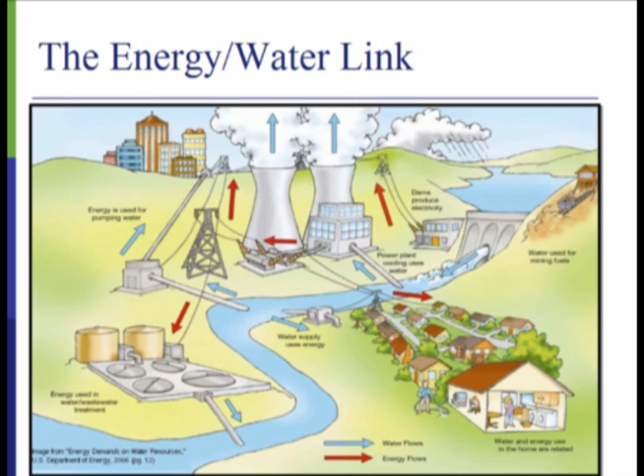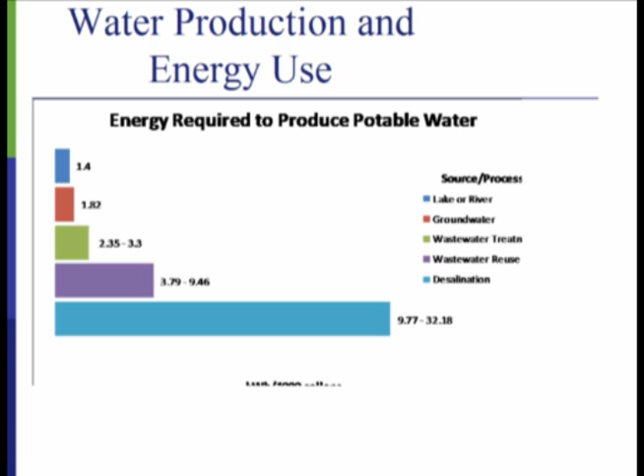So if you have leaks in your system, leaks in the transmission, you still are paying an energy cost for that lost water. Now, in the next slide, we're going to be looking at water production and energy use. Water delivery and wastewater treatment are extremely energy intensive, as you can tell from the purple bar. Water quality standards are becoming stricter, so more energy is needed to treat the water. And as population grows, more energy is needed not only to convey water to more people, but also over longer distances. So every year in the U.S., we have 5,100 miles of piping added annually just to get the water from the source to the plant. So those are all important aspects.

Some of the challenges we see begin with leakage. As I just mentioned a few seconds ago, leaks waste energy and water. And in many distribution systems around the world, we find many, many leaks. We find them in industrialized, developed countries where infrastructure is old.

In the U.S., we have almost 1 million miles of water distribution piping. And based on survey data, 3% of all that piping is more than 30 years old. We witnessed some, at a conference recently, pipes that are still active in an eastern city that were put in the 1830s. So we are talking some old infrastructure. Each year we have more than 237,000 breaks in water piping.

3,590 miles of piping have to be replaced every year, and we need a lot of additional pumping capacity to overpower the demand caused by leaks. In many systems, water utility operators have to deliver water, so when they have leaks, they increase the pressure to push more water through the pipes. But increasing the pressure increases the leak, so you have a circle that becomes unbroken. Unfortunately, it keeps leaking more and more.

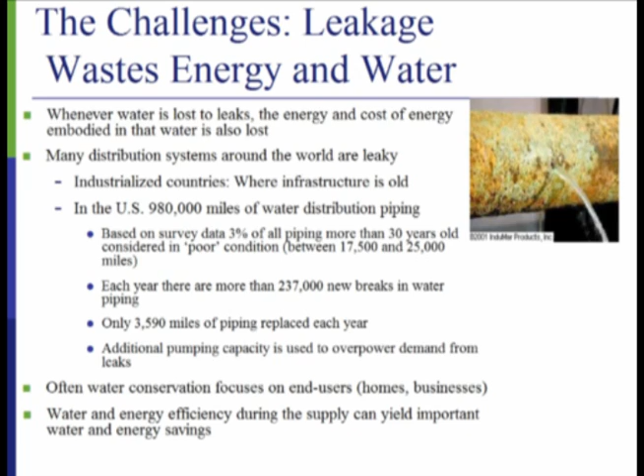So I think the next slide talks a lot about wastewater treatment and energy use. As you can see, aeration is a big part of the energy use in treating water. It accounts for more than half of the primary energy use that's needed.

You have these activated sludge processes that use fans and blowers, and they use a lot of energy. Pumps also consume a large share, requiring about 4% of total plant use. Heating and solids dewatering are processes employed to treat solid waste matter removed from wastewater streams. Other processes, such as chlorine mixing and effluent filtering, use about 15% of the consumed energy in this water and energy field.

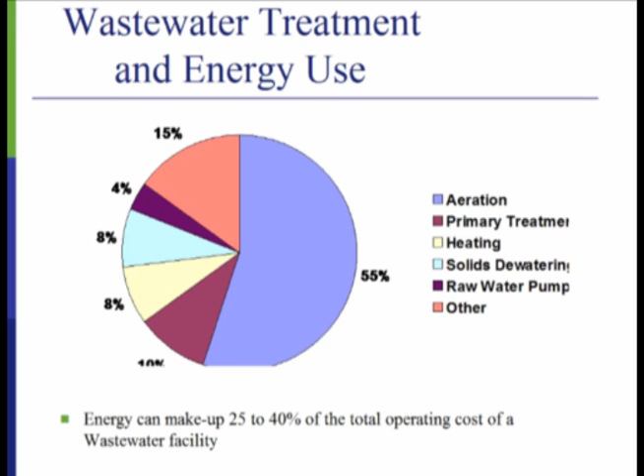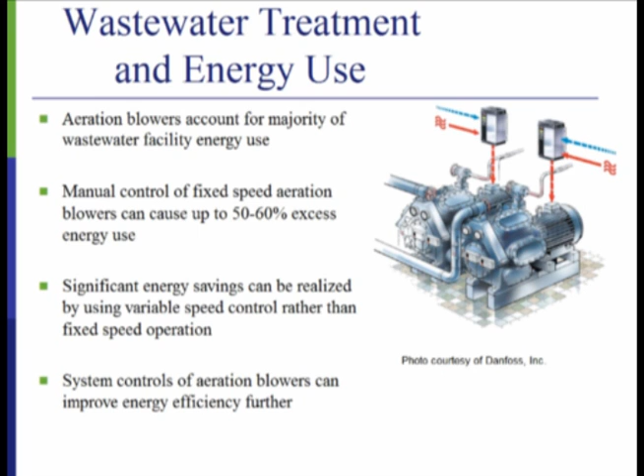Wastewater treatment and energy use is a very interesting topic. The aeration blowers account for the majority of the wastewater facility's energy use. Manual control of fixed-speed aeration blowers can cause up to 50 to 60% excess energy use, so variable speed controls, variable speed fans, and variable speed motors are really critical. Unfortunately, most of our infrastructure uses the same motors that have been there for the last 30 or 40 years, and they aren't variable speed. System controls on aeration blowers also improve energy efficiency, and we really have to look at this area when we talk about energy and water.

Now that leads us right up to the topic of today, which is Watergy. Watergy is a name that the Alliance began using around 13 or 14 years ago when it created this program to link water and energy. What it does is try to maximize the efficiency of both energy and water at the utility level. Each gallon in our system requires energy, and it's pretty easy to get 20% or more energy savings off of a typical system in the U.S.

Water and energy efficiency frees up funding for other crucial public services. This is really critical, because if you're a city manager and your water utility has huge water and energy bills, cutting those bills frees up dollars that can be used for education or other infrastructure within the city or municipality. So this is a good way to really free up funding that you wouldn't have otherwise.

Mitigating risk in increasingly water-constrained environments is critical even today, and it's going to be more critical later down the road. So what does a Watergy project involve? It involves an assessment of the main end-use application, assistance with design for energy efficiency where we look at the system holistically, examining every piece, and then looking at how we can add controls and sensors so operators know what's happening at any point in the system at any given time.

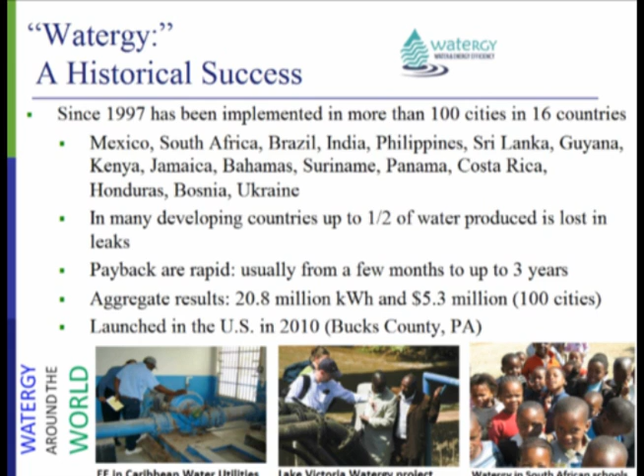Our aggregate results have been about 20.8 million kilowatt hours of electricity saved and $5.3 million annually in savings on these projects. Just this past year, we launched our first Watergy program in the U.S., in Bucks County, Pennsylvania. It's really been heartening to see interest in the U.S. now for a program that's existed for 13, almost 14 years in other countries.

The projects we've run around the world cover pretty much all the continents. We have projects in India, Ukraine, Kenya, South Africa. We've also done training on what Watergy is, at the level of plant operators and at the level of mayors of cities. Last year we ran a training program for 25 mayors in China. It's becoming a big issue worldwide.

Our next slide is a case study in Emfuleni, South Africa. There, the problem was 80% of the water flowing to the homes was lost through leaking main pipes and plumbing fixtures. That's 80% of the water. If you think about that, for every 100 gallons or 100 liters of water that flowed through the system, you only ended up with 20 getting to the ultimate consumer. That is a huge penalty on the energy it took to pump it through the system, aside from the fact you've had to provide all that water and it's just lost.

So the technical solution started with pressure management. We looked at automated pressure management valves on each supply line and reduced the high bulk pressure. Further reductions occurred at night through a demand response program. We commissioned $800,000 in construction in September 2005.

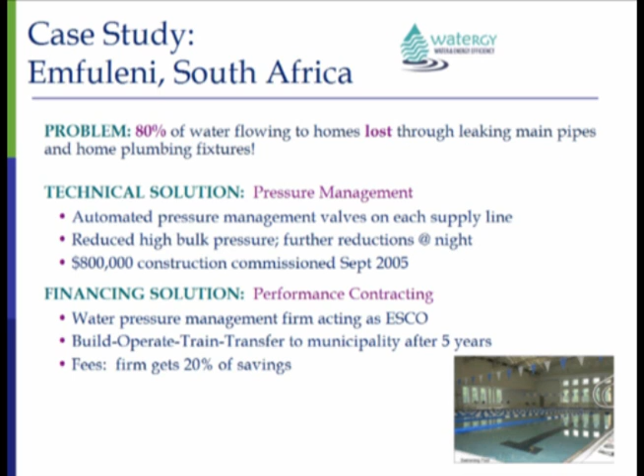The picture of the Olympic-sized swimming pool illustrates that every hour, the 80% leakage would fill 2 of those pools, and would fill a small reservoir in a year.

The Emfuleni results: our payback period was less than 3 months. Annual savings were $3.8 million, and water savings were over 2.1 billion gallons, or greater than 30%. Energy savings were 14 million kilowatt hours. An added benefit was CO2 reductions—more than 12,000 metric tons per year were saved. This was a great project, and it really shows the benefits of this program.

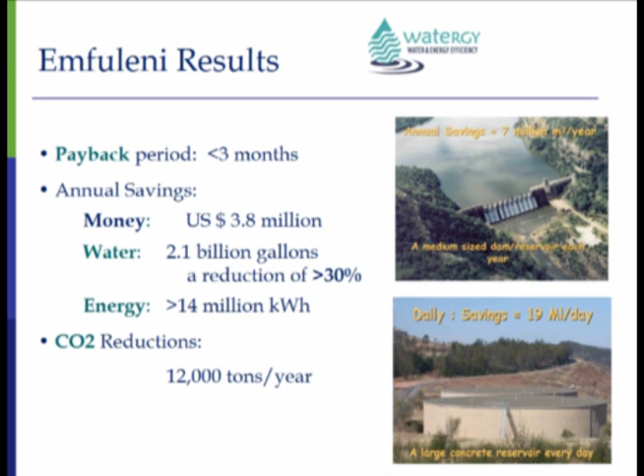A second case study is one we did in Fortaleza, Brazil. Here, many households weren't even connected to water service. There were many inefficiencies in pumps, operations and maintenance, and systems management. The utility couldn't afford the energy costs. So our project brought in automated controls and sensors on pressure and pumping, improved data collection and analysis, and improved motor efficiencies.

The automatic controls and sensors are basically like a SCADA system in the electric utility industry, giving operators immediate knowledge of what's happening at any point in the system so they can divert flows or cut off valves. It's a really important part of an overall system approach.

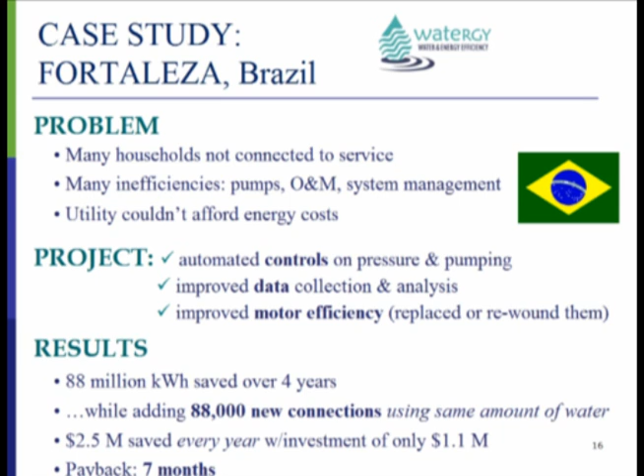Now, our results were pretty amazing here too. 88 million kilowatt hours were saved over 4 years, and this utility added 88,000 new connections but used the same amount of water as before we did the project. We had $2.5 million saved every year, and the investment was only $1.1 million. So the simple payback was 7 months. That again is a pretty amazing case.

So let me just reiterate now, the cost-effective actions in a Watergy program are improving the efficiency of the pumping system, leak detection and repair, lowering pressure, automated controls, energy management, and metering and monitoring. Those 5 areas are where you get quick paybacks and improve system efficiency to an incredibly high degree. I think I'm going to turn this over now to Mary Ann Dickerson.

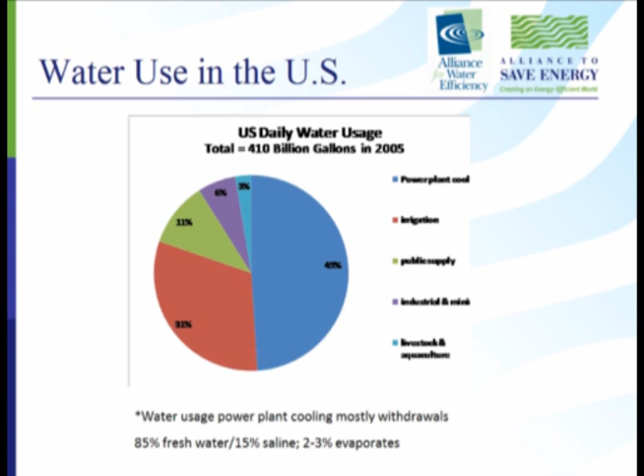So how does that actually relate to what we're looking at in terms of consumption? The first thing we need to look at is where there are areas of the country experiencing drought and shortages. This is the most recent U.S. Drought Monitor map, downloaded as of June 21st. You can see that large areas of the southern United States are experiencing D4 exceptional drought conditions, with Texas in particular being very hard hit.

When you download the map at various times in the year, it will always look different. There will always be regions in drought at one point and perhaps not in others. But what this analysis really shows us is that where there are serious drought issues, there need to be additional measures taken to optimize water use and reduce wasteful activity.

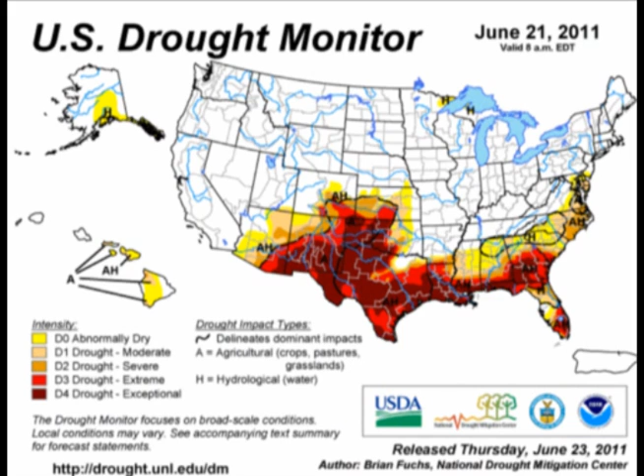But lest you think this kind of drought is restricted to these areas of the country or just the arid West, take a look at data prepared by the U.S. Government Accountability Office in 2003. They conducted a survey asking individual states when they were likely to experience a state, local, or regional shortage by the year 2013, which really is 2 years from now.

36 states responded positively, as indicated in the color coding: 2 states said they would have statewide shortages, 16 said they would experience regional shortages, and local shortages were reported by 18 states. But a number of states did not respond. 3 of them—California, Nevada, and New Mexico—I would argue are always in a continuous state of some kind of shortage. So I would argue we should add those 3 states to our number, making it 39.

If you take a look at Alabama, which did not report a shortage in 2003, it would very likely now say that the area around Birmingham is experiencing periodic shortages. So that makes 40 of the 50 states in a situation where water supply shortages are imminent or likely.

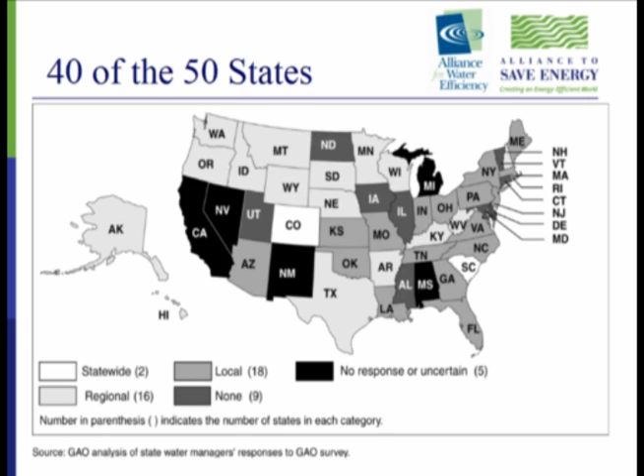How does this then relate to energy? Well, if you take a look at this well-distributed graphic from the California Energy Commission report, you'll see that each stage of that water supply, treatment, wastewater treatment, and collection cycle is energy intensive.

In 2005, the Energy Commission in California released an analysis in their Integrated Energy Policy Report that included an entire chapter on water, both urban and agricultural water usage, and documented ranges of energy consumption on a million-gallon basis. Adding up the entire water conveyance, treatment, distribution, end-use consumption, wastewater collection, treatment, and discharge yielded a range of 2,000 to 20,000 kilowatt hours for every million gallons of water produced. This is a wide range, but it's also a very significant amount of energy.

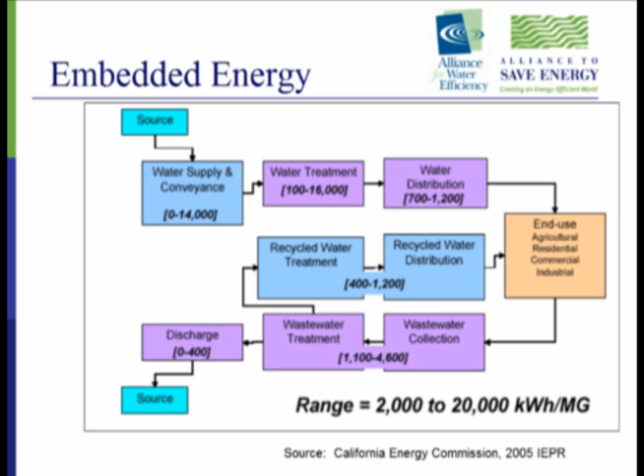With high embedded energy values in water supplies, utilities need to take a look at how best to reduce that energy load. Especially important is this orange area of end-use consumption, which shows that the customer is also an opportunity for energy efficiency and savings.

In the California report, they added up the sum total across the systems in the state, and concluded that 19% of their electric energy load was related to the pumping, treatment, movement, and end-use consumption of water, and 32% of the natural gas load was similarly related to it. So these are sizable numbers.

They indicate the enormous opportunity that exists in the water supply and wastewater treatment community for reducing that embedded energy load. But probably the most surprising finding for me was learning that 95% of the state's energy efficiency goals for that next 3-year period could be met by just funding water efficiency, and at a lower cost - 58% of the cost.

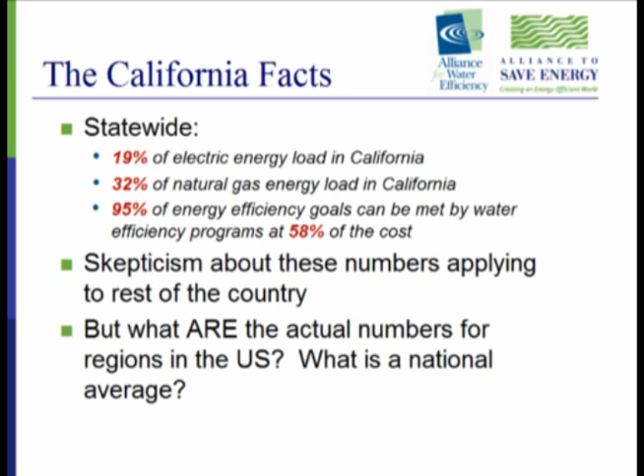So again, astounding findings, and the real question is: is this typical of states around the country, or is California an anomaly? Although there's lots of skepticism about whether these numbers can be replicated, there is clear knowledge that these numbers need to be analyzed for various regions around the country. We don't know what the numbers are regionally or even nationally, and this kind of analysis that was done in California needs to be done elsewhere.

So one organization did attempt to do that. River Network, a nonprofit organization based in Portland, a national organization, took the California Energy Commission methods and applied them to past studies done by EPRI and others, and concluded that 13% of the nation's electric kilowatt hour equivalent energy load was related to water and energy use.

So if we were to take what California reported as 19%, a national average might be as much as 13%, which is orders of magnitude higher than what had been originally estimated.

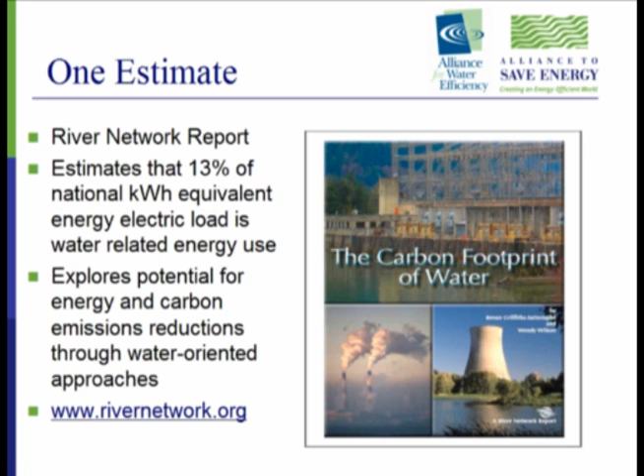This is a crude estimate. We clearly need to do something a lot more detailed, but it points up the need to take a harder look at what's going on at the local level. What the report does that's interesting is explore the potential for energy and carbon emission reductions through demand-side, water-oriented approaches. If you're interested in the report, there's the URL for it, rivernetwork.org.

So when we talk about those water and energy savings opportunities, what are they? Well, hot water emerges as, of course, the clear, obvious choice. You're heating water to render it to a high temperature, and that takes energy. So where you can reduce hot water usage, you're reducing energy. A lot of these programs have been funded by energy efficiency funds in the past.

So these are the kinds of activities in both the residential and commercial sector that deal with reducing water use. Clothes washers, shower heads, and faucet aerator retrofits are easy ways to reduce consumption while not asking the consumer to change any of their behavior. Water and energy audits can also identify where additional opportunities for saving water and energy can occur.

But a largely ignored area is the commercial sector, where certain sectors like hospitals and food service have very high water and energy footprints, and where commercial clothes washer replacement, commercial dishwasher replacement, connectionless steamers, and pre-rinse spray valves are all devices that greatly reduce the amount of hot water used overall.

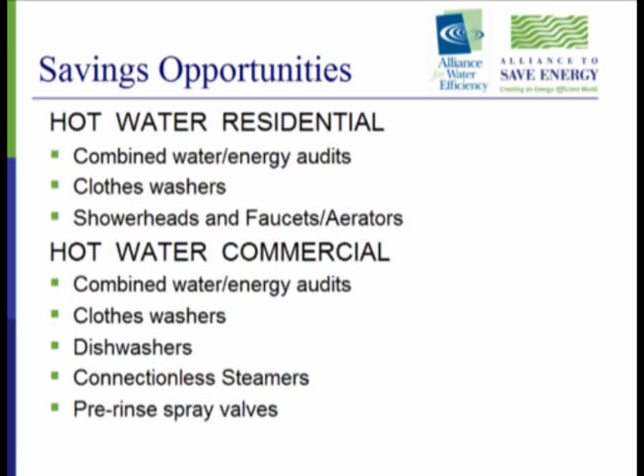Combined water and energy audits in the commercial sector, particularly for cooling tower management, are a terrific opportunity for maximizing those benefits. But let's not forget the cold water side. I think historically energy efficiency programs have not funded cold water programs because they did not believe that the embedded energy was worth funding.

But by ignoring the embedded energy in cold water, they're ignoring multiple benefits from that treatment and distribution.

A high-efficiency toilet does more than just save water at the consumer end. It also reduces flows for the wastewater treatment system and has the potential to extend the life of existing systems that might be capacity constrained, or has the potential for consolidating and creating lower treatment costs.

Landscape irrigation efficiency is another opportunity to greatly reduce a water utility's summer peak, a peak that has been largely growing in systems across the country, and often systems have to be expanded to meet peak demand that sometimes is only 13 or 14 days a year. So by bringing down that peak to more manageable levels and by making landscape irrigation more efficient, water utility systems are increasingly seeing great peak load management benefits.

But what is key is taking a look at the data for the actual individual utility. Generalizations on any statewide basis don't help, because the individual utility has to take a look at what its own embedded energy footprint is. And where there are multiple water supply sources, each water supply source is going to have a different embedded energy footprint. So whether it's groundwater, whether it's surface water supplies, or whether it's an imported supply that has to be conveyed a fair amount of distance, each one of these water supplies have to be calculated on their own merits to see which supply should be on margin and which supply should be optimized.

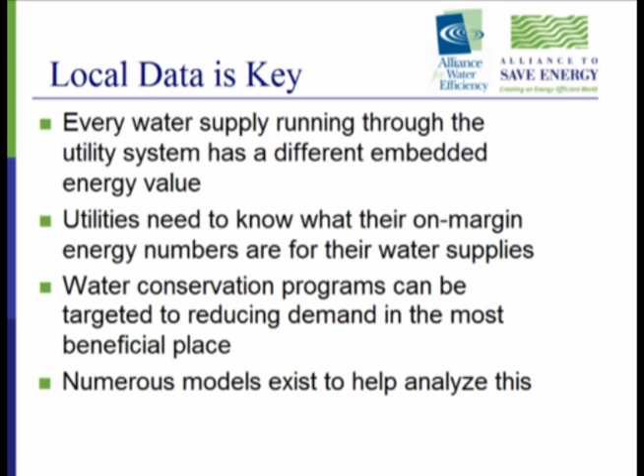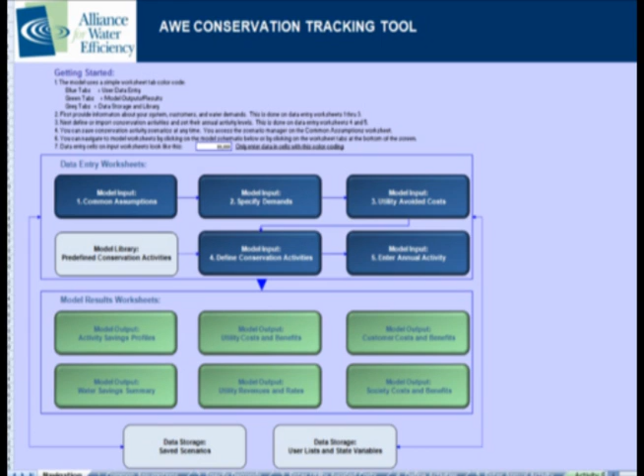I'm going to show you some quick screenshots from something we've built called the AWE Conservation Tracking Tool, which is a very utility-specific model that takes utility inputs and information about their specific system and how it's growing, and then applies water conservation options and evaluates whether those options are cost beneficial for that system. There are 25 programs that are pre-embedded in the model, but new ones can be created. It's a very simple Excel model with dialog boxes that are easy to use.

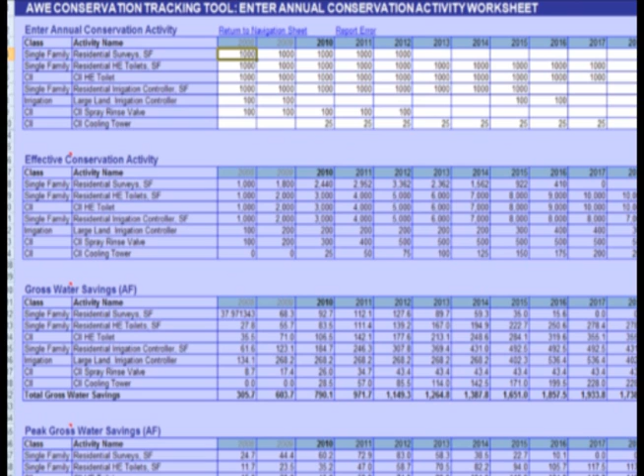Once programs are selected, and here you can see in this screenshot there are a series of programs that have been selected for demonstration purposes, the utility picks how many they want to do in each of a number of years, and then the model begins to calculate what the benefits are, both in terms of gross and peak water savings and net savings with the plumbing code factored in.

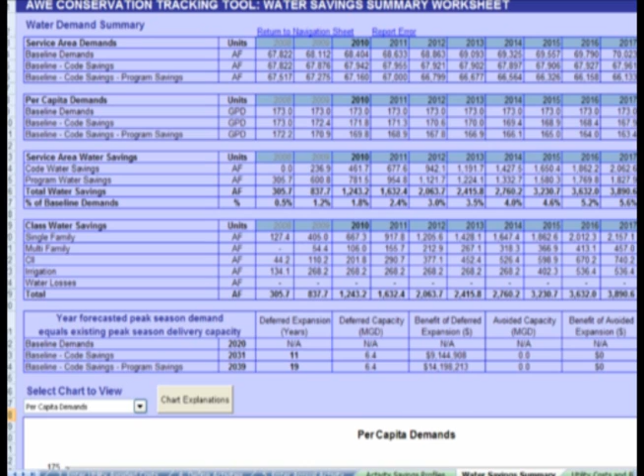Here's a screenshot that shows reduction in service area demands, per capita demands, water savings by sector. There are graphic outputs that show, as in this particular case, how capacity can be extended through the use of conservation activity. That solid black line at about 70,000, 71,000 acre feet is a capacity constraint line, which would be exceeded around the year 2020 with regular baseline demand unadjusted.

But once you take a look at what the plumbing codes and standards have provided in terms of benefits, you'll see that that capacity can actually be extended for quite a bit longer into the future, because these free savings from the national plumbing codes, largely unaccounted for in many demand projections, are actually providing a lot of benefit and reduced consumption to water utilities.

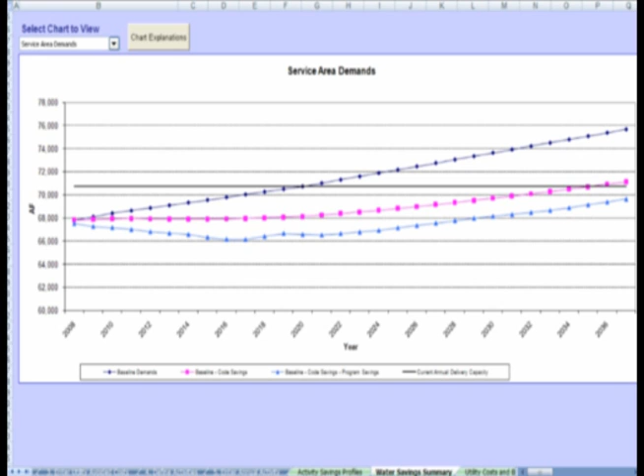Then the light blue line would be the active conservation programs that would be applied that further extend the life of the facility. Same with per capita demands, showing the reduction again in per capita, and showing how it affects peak season system capacity. Again, the same sort of analysis.

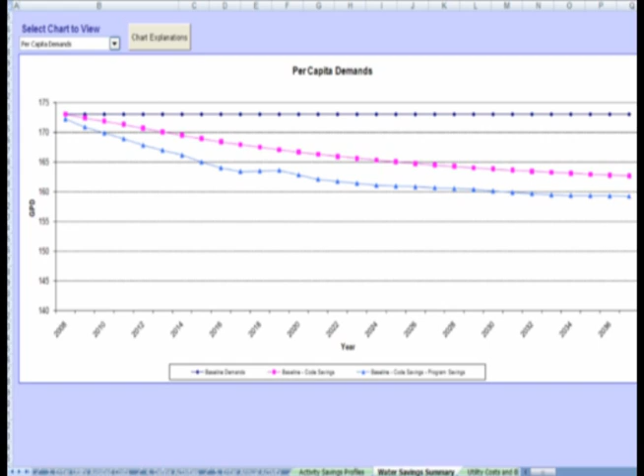And then what the savings are by customer class across the years, with the code included, and then with the code taken out, so that you know what the effect is of the code and what the effect is of the monetary investment that the utility is making.

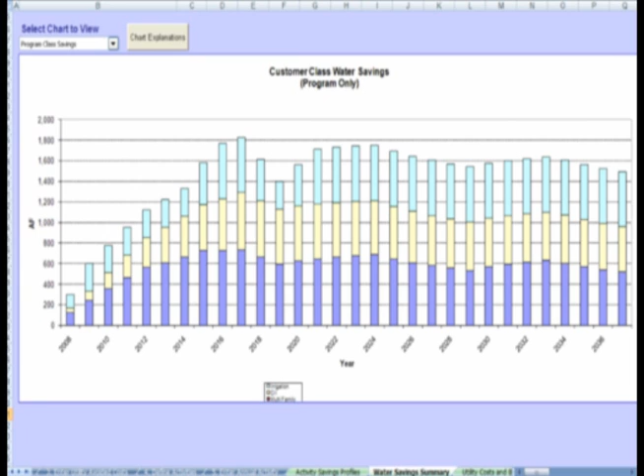Many of these models do benefit cost analyses, and ours does one as well. There's the utility costs on the top part of the sheet, benefits following, and then the ratio of benefits over costs, showing which programs have penciled out to be cost-effective for the water utility and which ones are not.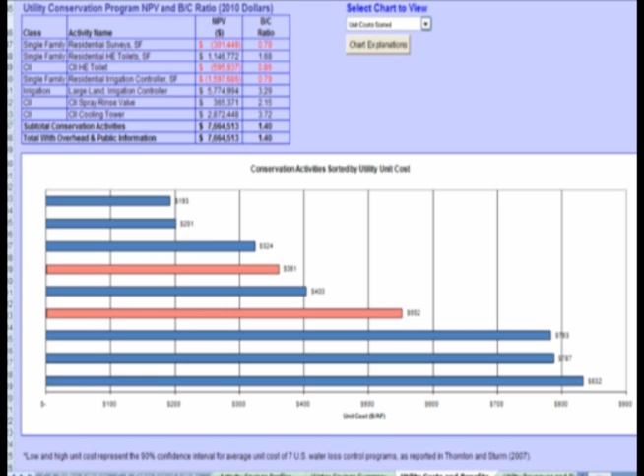To get to the energy part of this, the model also looks at where the water utility is located, plotting it by the E-grid region. You select the E-grid region where you're located and get summary data for how electricity is generated and what kinds of sources are used to generate that electricity in that region.

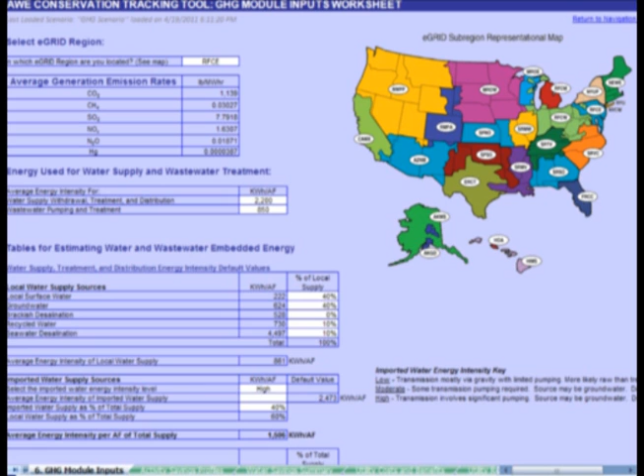The utility then answers a series of questions about estimating their embedded energy in their water supply and wastewater, determining that intensity for the various types of local supplies as well as for wastewater treatment. The model then begins to calculate what the utility-side energy savings are from the conservation programs chosen, as well as the customer-side energy benefits from those same programs.

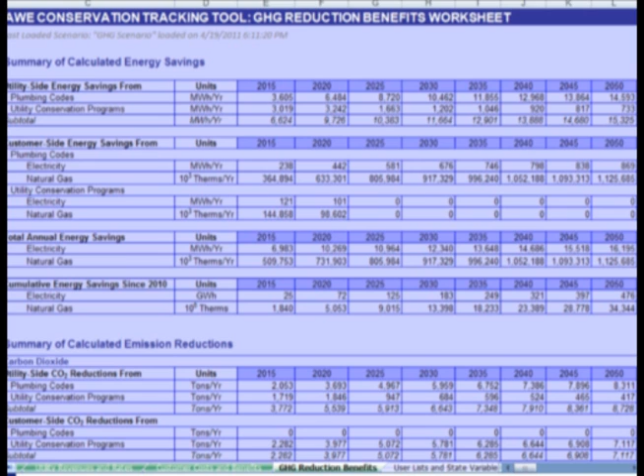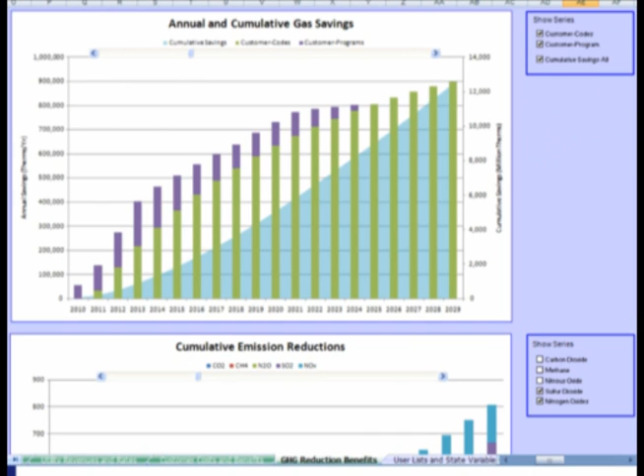And then it computes the annual and cumulative electricity savings for both the utility and the customer, the annual and cumulative gas savings for both the utility and the customer, and lastly, the emission reductions from the conservation programs scripted in the model over the period of time indicated.

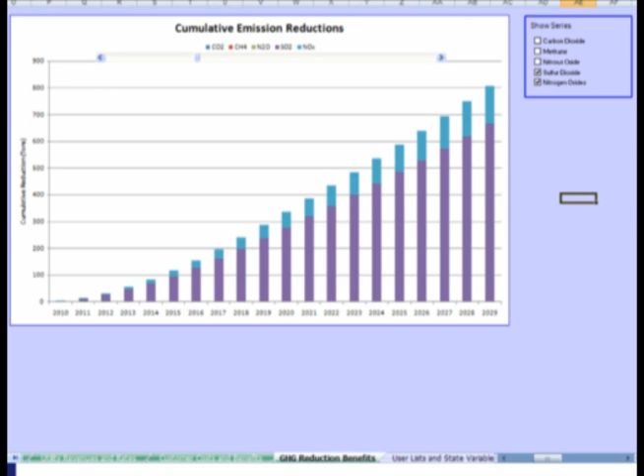So this allows a utility to look at the energy benefits as well as the water efficiency economic benefits, and to factor that into their long-range integrated water resources planning. I show you this model because others exist, but it's important for all water utilities to look at what they can cost-effectively fund in terms of incentives for their customers, and how they can do so without hurting their own bottom line.

One of the major concerns for many water utilities is meeting their fixed costs and revenue requirement. So one of the things our model does is estimate the changes to the utility revenue requirement from implementing a water efficiency set of programs, giving them the opportunity to evaluate how best to meet that. In this chart, you see serious short-term impacts in the first several years from implementation, both from reduced demand and reduced sales, but also the cost of the program, which is usually funded in current operating year revenue.

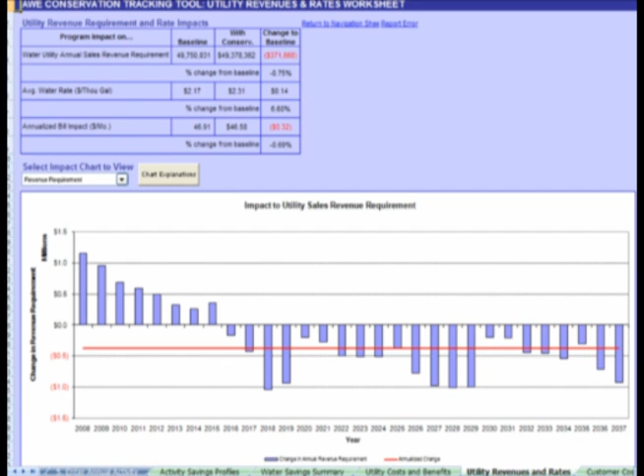But if the program is debt financed over a 20-year period, which is what the red line shows, it's an overall cost savings for the water utility system. That's the important piece of information to take away from this chart. It depends on how you structure how those charges are paid for over time, and constructing what will be a net benefit for your customers over time.

So what does that get us to conclude? System optimization is a very important activity, and the Watergy program has done an excellent job of that. But we also must remember that a large energy benefit can also come from customer demand-side conservation, and that can be calculated pretty effectively.

One of the reasons to do that is to take advantage of energy efficiency funding, which is available at the federal level and in some states to fund customer water efficiency programs when that energy benefit can be calculated and demonstrated. We are increasingly working to make sure more opportunities are available for funding of water efficiency programs for that energy benefit.

That's one of the recommendations made in a recently released document called A Blueprint for Action. We all know more attention is needed at the federal level on this water-energy nexus. Last December, a large group of stakeholders, including the Alliance to Save Energy, came together to examine what recommendations should be made to policy leaders at the federal, state, and local levels to address these issues related to water and energy.

So I invite you to take a look at that report, and there's the URL on our website where you can download it and view it. We're increasingly wanting to promote the water and energy efficiency benefits on the embedded energy side, as well as better management of the embedded water and energy on the power plant cooling side and siting side.

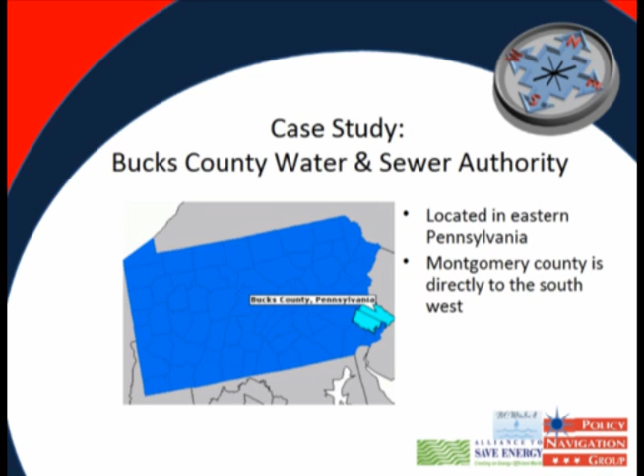Bucks County is a pretty typical utility, and that's why I think it makes a great case study. It's a nonprofit authority that operates with an independent board of local elected officials. It can reinvest money; it's not a municipal entity. It has about $65 million in annual revenues and serves nearly 400,000 customers in Bucks County and Montgomery County. To give you an idea of how typical it is, there are 27 water systems like it in Pennsylvania that serve over 100,000 people, and about 1,000 of these types of systems serving over 100,000 people in the United States.

So what you're going to see in Bucks County is very typical of an eastern utility, and very typical of the enormous amount of energy efficiency opportunities there are at our water utilities across the country. Also interesting, common to how water systems have evolved to meet changing energy and regulatory requirements, Bucks County has grown by acquisition, taking over smaller, sometimes town or municipal systems over the last 15 years, and had an enormous amount of organic growth.

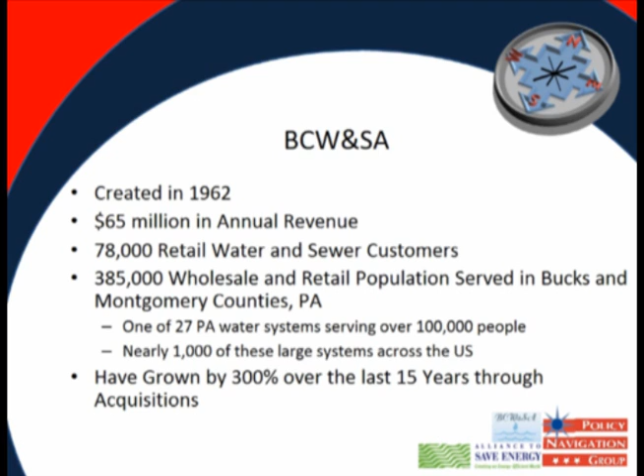So why is it a typical eastern water system? Well, unlike out west, where there's much more concern about water scarcity and having to bring water large distances, in the east the water is pretty readily available. There's some pumping and storage, but it's not a major part of their system. It has high-quality raw water, which is increasingly a rare commodity in water systems. But conventional pretreatment is sufficient—unlike Western systems or many systems where water is scarce and extensive pretreatment is required. Bucks County, like many eastern systems, can do relatively simple pretreatment, so energy intensity in their pretreatment system is not that big of an option.

However, their distribution system is based on the history of how towns evolved and developed over 300 years, not a rational grid system layout to deliver water from where it is to where it's needed. So there's a lot of inter-system pumping, pressure zones, and things like that which consume energy, creating great opportunities for more effective management.

The other thing that really drives their considerations, and many water utilities' considerations, is that energy is one of their top 3 expenses. If you talk to water utilities across the nation, energy costs, electricity costs in particular, are often the second or third cost after labor. They spent $1.7 million in 2009, and are facing 30 to 40% increases in their state over the next couple of years. They're a big consumer—they look like a large industrial facility, consuming over 20 million kilowatt hours.

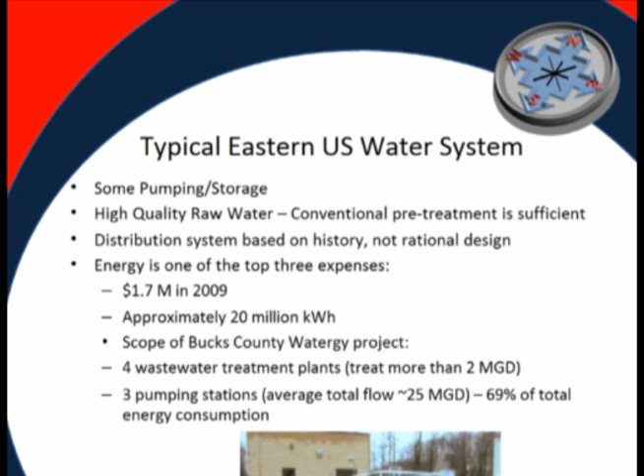Our project looked for three elements in the energy management plan. We looked at efficiency in the equipment and the pumping and treatment. We looked at the possibility of generating energy through their system.

One of the things I think that is less well understood about drinking water systems is, given their distribution system, there are opportunities to generate power through pressure relief valves, through use of the land area they may have for renewable energy projects like wind and solar.

Many water systems operate storage systems that have excess pressure, like the water tanks you see in many communities. That water rushes down into the distribution system. There's opportunities to capture some of that potential energy to use to power local needs.

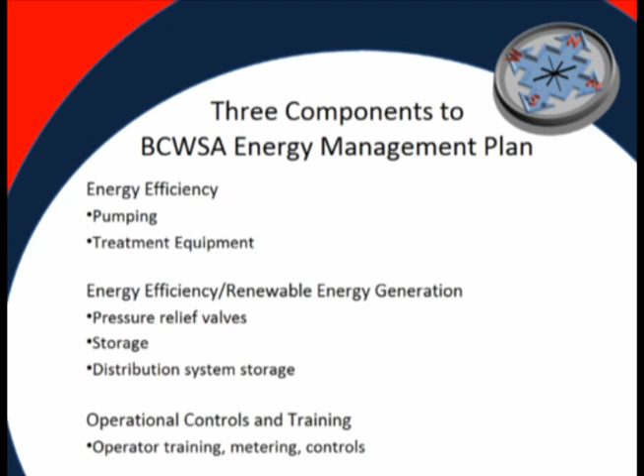And finally, we looked at the human element, the importance of operational controls and training. Do they have the right meters and measuring devices to know what energy they're consuming to fit into an operational plan, to give their staff the ability to manage energy the same way they manage water flow and water quality.

So after some very detailed on-site reviews, interviews with operators, interviews with management, the combined team came up with solutions, some of which include pump controls, blower replacements, mechanical and metering improvements, and operator training.

Finally, we took all those and said, well, we could pay for all these out of our existing cash flow, but what opportunities are there for financing by government, utilities, and private parties?

Right now, just to put it in perspective, the traditional source for water utilities for support has been the Federal Drinking Water Revolving Fund, or the Clean Water Fund for wastewater utilities. But in real terms, that money has shrunk by 30% over the last decade. So water utilities are having more and more financial needs and less traditional levels of support.

So what we've been doing with the Alliance and with our water utility partners is translate these projects so they meet the criteria of all the funding that's available for energy efficiency projects at the federal, state, local utility, and even private party level.

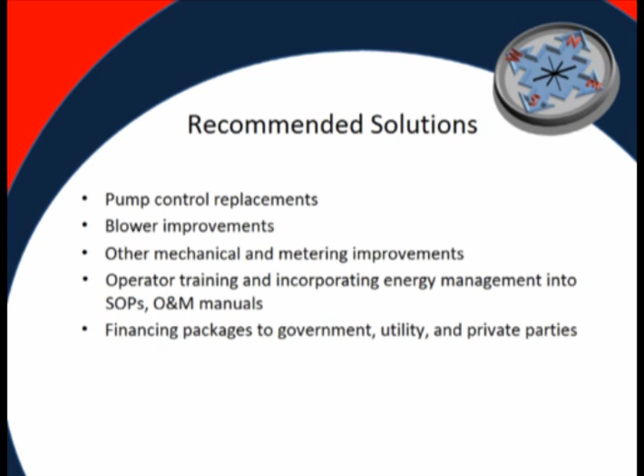So we did the financial analysis that looked not just at the traditional rates of return from the energy savings, but looked at whether these projects then qualify as energy efficiency projects.

So when we do that, we look at the energy savings that the combined package of projects we found for Bucks County will save, 4 million kilowatt hours, or basically 20% of their annual energy use, save over $300,000 in operating costs, and their payback is less than two years.

So they're basically getting a 65% rate of return on their investment. From a carbon, CO2 greenhouse gas perspective, it's equivalent to taking 4,000 cars off the road.

The incentive programs we found through the state, through Pennsylvania, through the local utility, greatly improve the payback. Basically, from a financial perspective, the water utility looks at it as: if I spend $1.8 million, I get $3.2 million back in reduced energy costs and direct payments. So this is a very attractive financial opportunity for the utility.

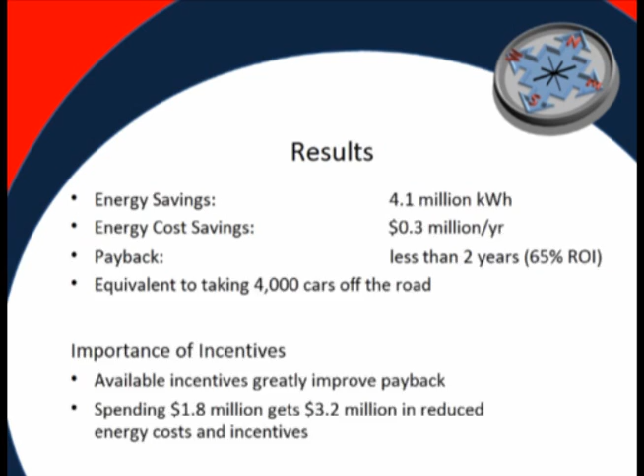And this is pretty common across the country if you look at the availability of state funding and private utility funding. It's now well surpassing the traditional levels of the Drinking Water Revolving Fund and traditional support for water utilities. And like I said, it's just the tip of the iceberg.

If we think of it from a public policy perspective that I know Bruce will be talking about, if we want to think about where we can get large returns on our energy efficiency funding, whether you're a private entity wanting to promote energy efficiency, a power utility, or a water utility looking to market your energy efficiency projects for these sources of funding, we have about 1,000 large water systems out there.

We have well over $500 million in private and government energy efficiency incentives, and that number is growing rapidly. And water utilities really offer something for energy efficiency funders that's hard to find.

As we say, it's the gold standard for meeting the requirements for an electric utility or a federal agency that's trying to show that they can document that they've really achieved energy efficiency. So we are very excited to be part of this, to show this enormous opportunity that's out there for water utilities, not only to reduce their operating costs, but help find partners that can defray those costs.

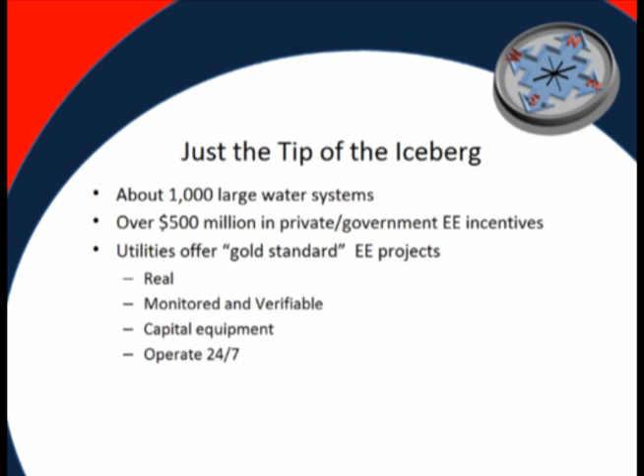Just wanted to go over one little addendum of the energy project over at Bucks County. One of the things we wanted to point out is that the approach we use with Watergy is a best practices approach. As Jonathan mentioned, we really sought buy-in from the plant personnel at all the sites of Bucks County, so we started with a collaborative approach. We included various levels of management as well as operations, and we took on-site measurements of the energy uses rather than sitting at a desk and calculating theoretical energy savings using nameplate data. We actually went on site and examined the entire systems from top to bottom to derive the energy savings estimates.

Another big part of our approach is that we are technology neutral and product agnostic. The Alliance to Save Energy and Policy Navigation Group have no financial interest in any of the equipment purchases that may happen if Bucks County or any other utility were to implement some of our recommendations.

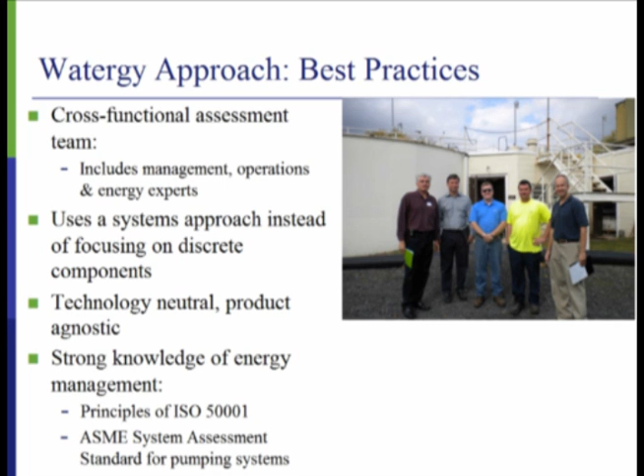And then fourth, and really the biggest, most important component of this, is our knowledge of energy management. When we went through the assessment, we applied the principles contained in the now released ISO 50001 Energy Management Standard, and also one of our experts was one of the prime contributors to the American Society of Mechanical Engineering System Assessment Standard for pumping systems. So we really applied the best practices of energy assessment and energy management to this project.

A few policy implications we've noticed so far from this project and a few other conversations we've had is that for water and energy utilities, there is a need for better coordination. A lot of times these communities, the water and the electric utilities, don't talk to each other very much, or if they do, sometimes they don't talk to each other very well. So there is a need to raise awareness in both camps about the end-use needs of energy and water for both of them, and how they can use them more efficiently.

Regulatory structures could have more incentives for water and energy efficiency, particularly at the end-use level, but also at the supplier level. There are codes that can yield better efficient water delivery and treatment. Right now, there are still some homes in the United States made with polybutylene piping. That was a disaster for a lot of homeowners and something that needs to be upgraded.

Finally, there are some voluntary programs that can be leveraged that use energy management standards, particularly Energy Star at the EPA, and then a new developing program called Superior Energy Performance from the U.S. DOE.

Financing is also an important application. There needs to be more access to capital, particularly for the assessment services, as well as energy efficiency implementation, and perhaps also accelerated depreciation of energy efficient equipment.

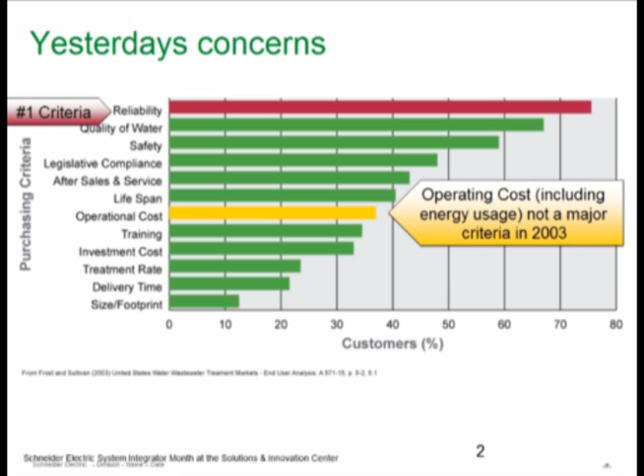First there was Katrina, then the Gulf oil spill, concerns coming out about global warming, and the economic collapse had an impact on municipalities' tax bases. On top of that, governmental awareness increased. Back in 2009, Jeanette Brown had a conversation in front of a House subcommittee on energy efficiency—she works for WEF, by the way, if you haven't heard of her. Then the EPA moved and expanded the Energy Star program into water and wastewater. All of these impacts together have really changed the way municipalities look at energy.

That's not to say that we at Schneider Electric are seeing every municipality look at energy. I'm out with municipalities all the time, and you'd still be amazed how many people I talk to say, 'Well, I'm the facility manager, but my electric bills come in and go to the accounts payable person, and I never see them.' So sometimes you just need to make people a little more aware of what the energy actually is. But the world itself is really changing before our eyes.

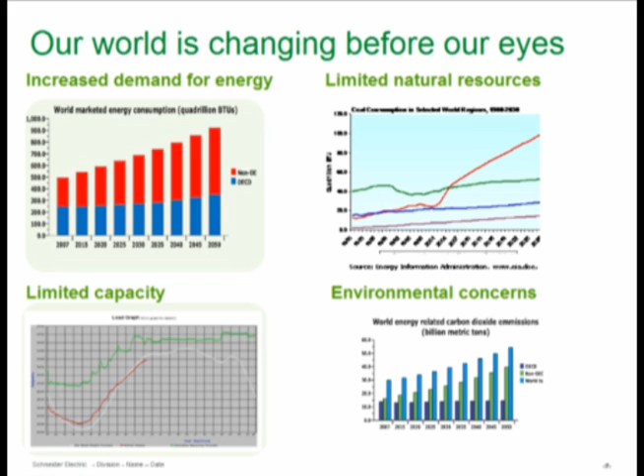We're starting to see increased demand for energy. There are limited natural resources, limited capacity, and environmental concerns. This is driving toward a worldwide increase in energy, basically doubling energy use by 2050, while at the same time we'll have to decrease CO2 emissions by about 50%. There are a variety of ways to do this, but it basically comes down to the fact that we have to do this now—it's not something we can wait upon.

So to tie this down into water and wastewater, what are we actually seeing as some of the challenges, at least on the Schneider Electric side? We're seeing what was touched upon before: water scarcity. More than 35 states are anticipating water shortages by 2013. We're also seeing some effects related to climate change.

It's going to significantly adapt the way that we maintain and utilize our infrastructure resources.

Increasing population, energy uncertainty, and the depletion of our traditional fuels, being gas, oil, coal, and so on, is really causing instability in energy prices, making it tough for utilities to create a stable budget, which is key. And then, of course, aging infrastructure. By 2031, it's going to cost somewhere between $300 billion to $1 trillion to repair, replace, or upgrade facilities out there.

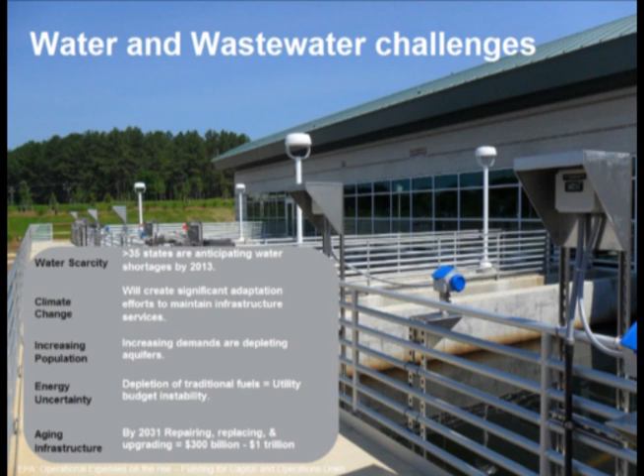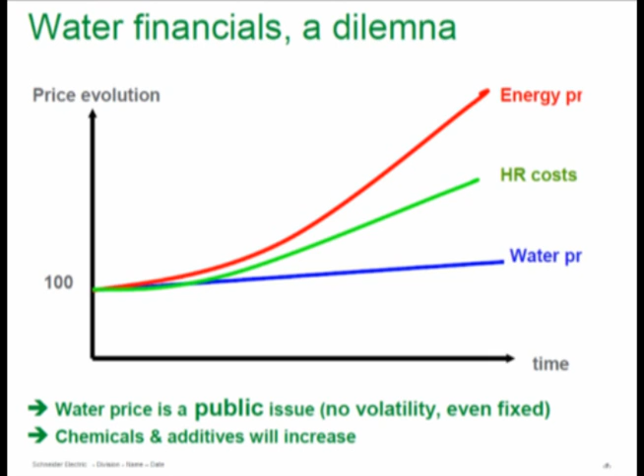Really what we're seeing, and this has been touched on before, is $4 billion annually is spent on energy, about 1/3 of municipal energy spend. What's interesting is when you consider a large municipality, let's take Indianapolis, Chicago, or New York, and realize how many fire departments, police departments, schools, other government buildings, plus all the stoplights - that only comes up to 2/3 of the city's energy usage. 1/3 is running in the water and wastewater areas alone.

Looking at a 10% reduction, we save $400 million, and the interesting thing is 5 billion kilowatts annually. That's enough, if we actually pulled it off, to cancel construction of power plants, or maybe shut some down that are reaching the end of their life.

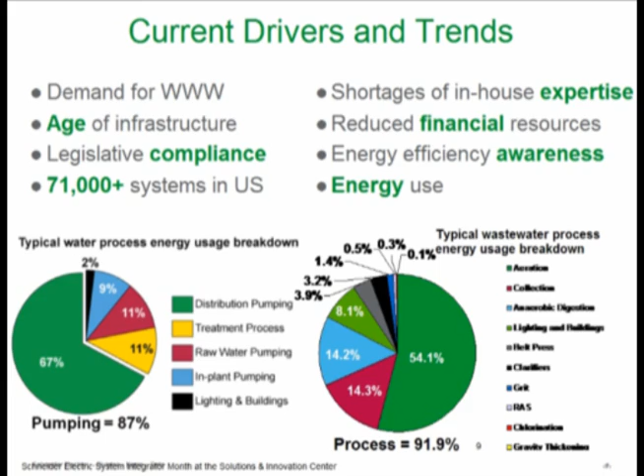So how do you save energy? We see it as a three-part approach. First, energy efficiency. You lower your demand via energy use reduction, but that's not going to get you to heaven.

That is only part of it. The other thing you have to do is lower your demand response, via load shedding. Perhaps if you run a wastewater plant, you can take your sludge pressing operations to the nighttime instead of during the day if you get higher energy rates during the day. This also preserves grid integrity and saves resources.

The way that the power companies work is this: they will monitor you over time, say for 90 days. On this one day in June in the afternoon, you used 2 times more energy than you normally do. So to make sure you can do what you need to do, we have to supply, over that 90-day period or that year period, double the amount of energy available at any given moment.

So if you lower your demand, the utility can come back and say, okay, we know you're going to use less energy, and by adding that with yourself and all the other energy users out there, they may be able to say, you know what, we don't have to produce 100 kilowatt hours now, we can actually produce 95 and still keep the load happy. So utilities will have demand response billing in your bills that, for lack of a better term, punish you, or make you pay for high demand response, so you want to lower that.

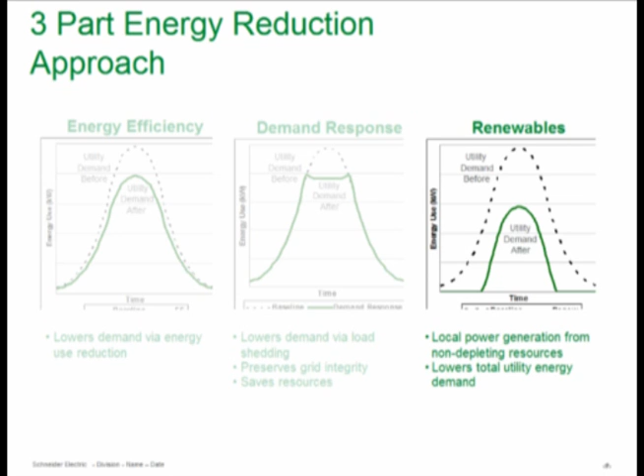Another thing to talk about is the energy savings ratio, which is actually 3 to 1. What this chart is showing is, let's say we're using coal - the fuel is irrelevant, the same type of efficiencies come in. So you've got 100 units being created by coal or gas or whatever you're burning. About 2/3 of that is lost in the power plant. So the coal has 100 units of energy, your fuel has 100 units of energy, but by the time you come out of the plant, you've had a 60-some-odd percent reduction in energy.

So you're only releasing about 35 units of energy to your distribution grid. Then once you go through that grid, through all the transformers that step the power up and down, the line losses and all those calculated in, you're going to lose about another 33 to 35% of energy. So basically, for every 100 units produced, only about 1/3 will reach the water or wastewater facility. Therefore, 1 unit saved at the facility equals 3 units saved at the plant.

Now we tie this back into the water figure I told you before: 25.1 gallons per 1 kilowatt hour. If we actually save 1 kilowatt hour at the facility, by the time we multiply that by 3 and convert that to gallons of water saved, you're actually saving really 75.3 gallons of water. So we talked about how much water is being pulled out of a variety of resources to go into energy production, and here what we're saying is, if you're a water utility and you save 1 kilowatt hour, you're dramatically decreasing the amount on the other side.

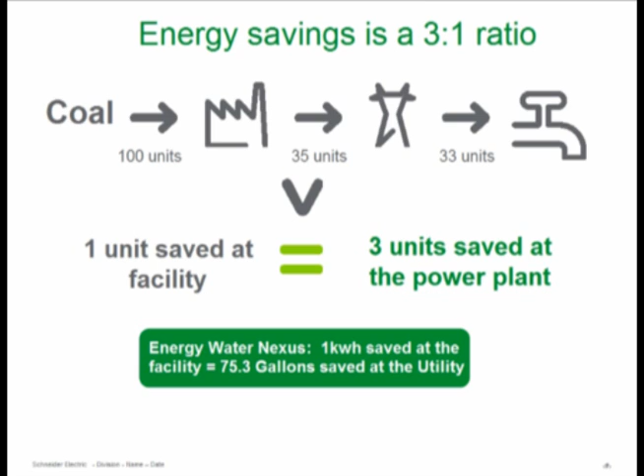And as we all know, a lot of water utilities have programs to save water through either low-flow shower heads or irrigation sprinkler flow limiting devices, that type of thing.

But let's talk about how we save energy directly. The fastest way to do it is through a 4-step process. Number one, we believe, is the most critical, because without it, you can't do the rest of it reliably over time: audit, meter, and measure your energy.

Now, it has to be what we call active energy management. We have a lot of systems, as do our competitors, that have been put into distribution centers as far as power distribution equipment to monitor energy usage. But although these systems monitor the energy, the power, and all these power meters, they are actually just sitting there, not integrated with the process SCADA.

So you can go up to a utility person and ask, can you tell me what the dissolved oxygen is in Basin 3? He'll look on the SCADA system and find it. Then ask, what was Basin 3 doing on dissolved oxygen at this time of day three weeks ago? He goes into the trend logs and finds it.

Now ask him: when you were at that same dissolved oxygen level of 3.0 three weeks ago, and dissolved oxygen is 3.0 today, what was your energy usage three weeks ago compared to now, even though the dissolved oxygen was the same? That's where a lot of utility people will just stop and say, I don't know.

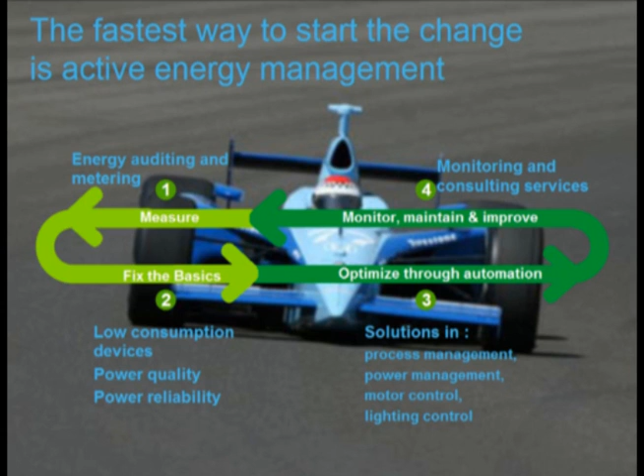And number 4 is continued monitoring and consulting services: monitor, maintain, and improve. When you do number 4, you'll actually find yourself back at step 1 again—it's a continual loop. That's how we see this has to be done over time.

Now, remember what I said about pumps in water, or blowers being the pumps in wastewater. The interesting thing is when you really look at the life cycle cost of a pump, and the same goes for a blower, 40% of it is for energy.

But what we see so often on bid day is that the focus is on what that pump actually costs—is this pump $10 cheaper than another brand, and will it do the same thing? There's so much focus on this, but no one ever asks: brand X is $10 cheaper than brand Y, but does brand X have a higher energy spend over the 20-year life cycle of a pump? That question is rarely ever asked. But at the end of the day, what's being paid for by the municipality is the energy.

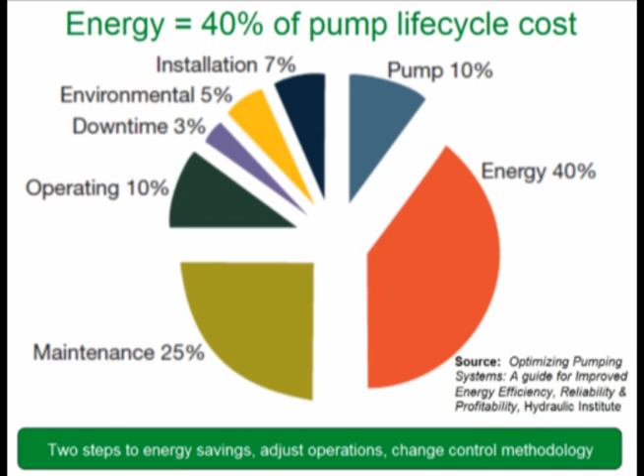So how do we reduce energy? You've heard, and will probably hear even more, talk about VFDs saving energy, and they are a very important tool to assist you in saving energy. But a variable frequency drive is really just a power converter—you take a voltage current coming in at 60 hertz, or 50 hertz in a European country, convert it to DC, then reassemble it at whatever frequency you want. It doesn't really save you too much energy directly.

Where the savings come in is something called the affinity laws. These are really designed to affect centrifugal blowers and pumps. With a positive displacement blower or pump, you do save energy as you reduce speed, but that's governed by a completely different set of rules we're not covering here. What the affinity laws find is the impact of varying speed on flow, pressure, and power. Here's what it basically says: your flow will change proportionally with a change in speed.

Likewise, your pressure changes by the square for a change in speed. Now, this is really the devil in the detail, because as you back off on a blower or a pump application, you really have to look at your discharge pressure and make sure that it's still high enough to do the work you are trying to do.

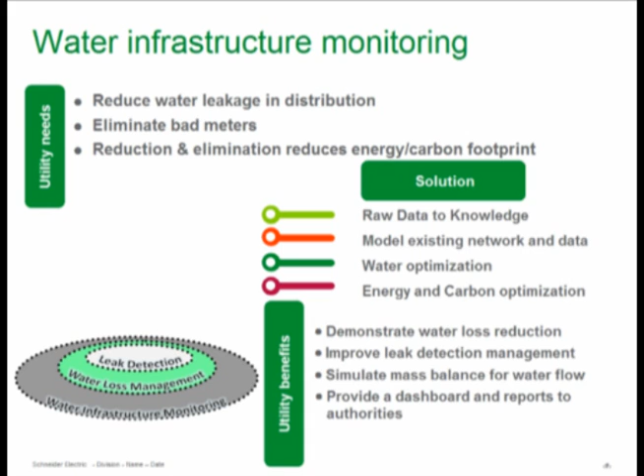So one of the things we did at this facility over in Europe, the city, is we started off with 2 months of infrastructure monitoring of their more than 2,000 miles of distribution piping. And what we found was this: there were 62 metered districts, as they call them, or DMAs, that were traced out. We found 78 faulty meters and dozens of energy events, found 49 unknown leaks, and actually detected 17 bursts with 2 hours advance notice.

In other words, we started to see certain things going on in the distribution system that led people to see, after understanding the data, that hey, we're going to get a burst here, we better go out and take care of it. This solved some blind spots, repair verifications, non-operable DMA alerts, and zonal alerts.

And then this led towards maintenance prioritization, meter placement, and acoustic surveying timing. In other words, we would be able to know, okay, this DMA's got a leak in it, now you could go out with your acoustic tools and trace it down, where before you might have been at the mercy of a larger acoustic testing program.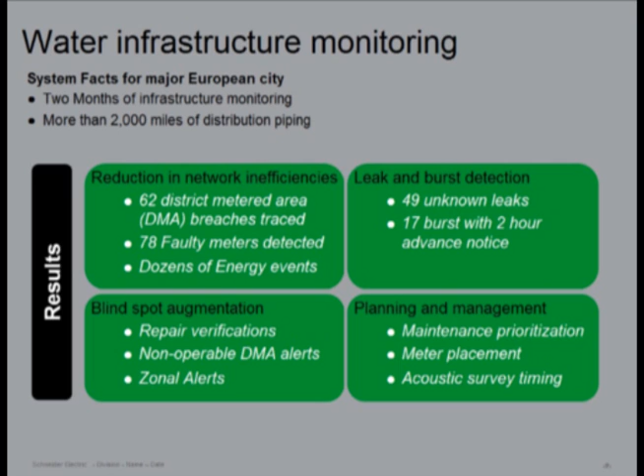Please forgive me for a second, I have lost my mouse. There it is.

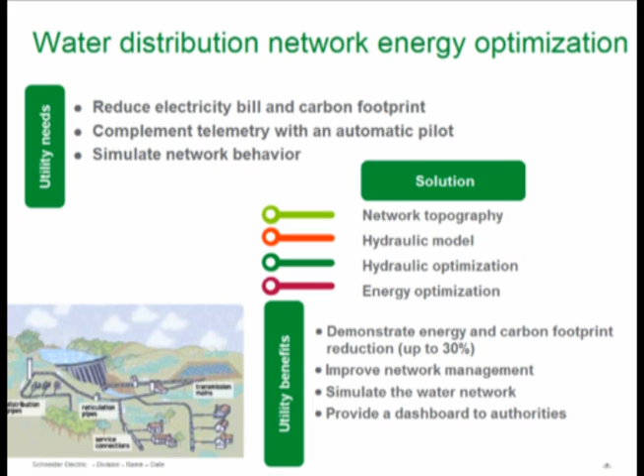We were able, in this one facility, to demonstrate energy and carbon footprint reduction up to 30%. And here's kind of what we saw: the system we looked at here is 68 million gallons a day, 165 million gallons a day peak in the summer. So this is actually more of a larger resort type of facility, with 5.5 million in distribution pumping costs, 2 water plants, and you can read the rest of it.

What we did was we put an automatic hydraulic optimization algorithm on top of the control system: 14 pump stations, 62 pumps, 10 flow valves. You can see how that all works out. And the benefit: 20% lower energy costs, and reduced peak summer demand by 4 megawatts. So that is quite significant, and the results were well beyond what we had anticipated.

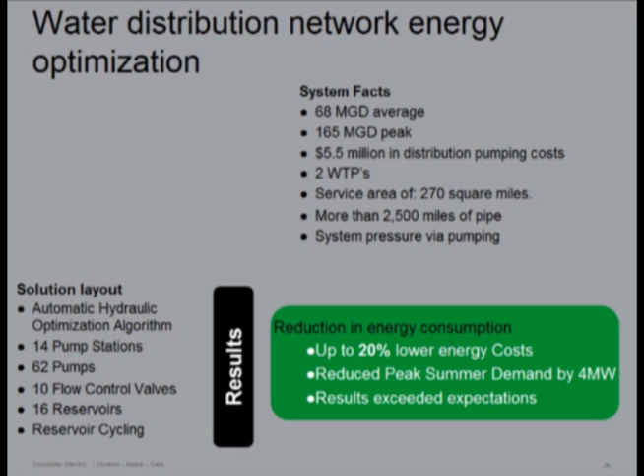Similarly, we took a look at an activated sludge plant over in a European city. The interesting thing is that with activated sludge, we're typically looking at dissolved oxygen as the driving point for either the blowers themselves, or the blowers and zone valves located close to the sensor.

Dissolved oxygen is really almost like a secondary parameter. In other words, once you understand how your plant behaves, you can derive a good dissolved oxygen set point that you set for control, and let the blowers go for that point. But we've got a way to look at 20 to 30 other parameters going on within an activated sludge plant and say these are the critical ones, and as long as we maintain them, dissolved oxygen can be basically anywhere. We will drive that dissolved oxygen point wherever we need it to be, and drive the blowers wherever they need to be, to meet all the rest of the critical demands.

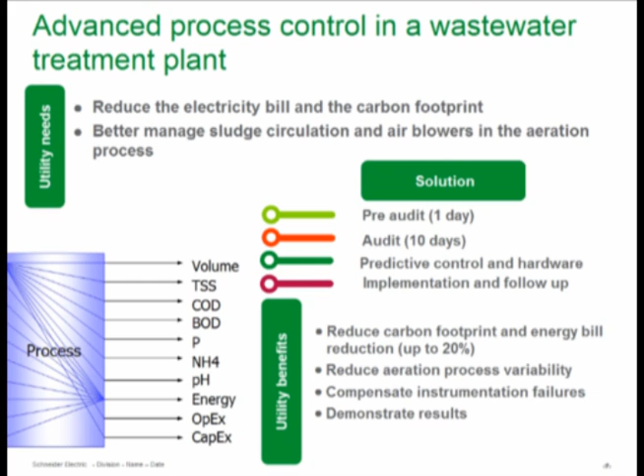So what's happened here is we are seeing a reduction. In this case study, the first thing we did was pull off the finite limits on dissolved oxygen, such as 1.5 milligrams per liter as an upper limit and no less than 0.5 milligrams per liter. We did this by controlling the inlet and outlet quality parameters of the water, saying: so what if you've got 0.3 milligrams per liter of dissolved oxygen going into the system, as long as the rest of the parameters you need to treat are being maintained, that's also okay.

Likewise, if we have to go up to 2.5, we can do that too.

Another thing we did was aerator control on sensor failure. Because of monitoring other parameters, we're able to look back through history and reconstruct a missing signal. So if your dissolved oxygen probe goes out, we can reconstruct that, and we're able to eliminate the fail-to-full-aeration mode, which, as you know, if you've got a bad dissolved oxygen sensor, you go to full aeration because the theory is it's better to over-aerate than to kill your biology. We're now able to eliminate that.

The other thing is aerator operation controlled more accurately by matching the BOD and feeding forward. In other words, we're seeing something coming in at headworks, and we can start to react for it before it actually hits the ASP part of the plant. The result was up to 35% lower energy, which equates to 0.75 kilowatt-hours per kilogram of BOD. Carbon reduction was about 260 tons a year, and the project ROI was less than 18 months. So we got about as close to optimal ASP performance as we could.

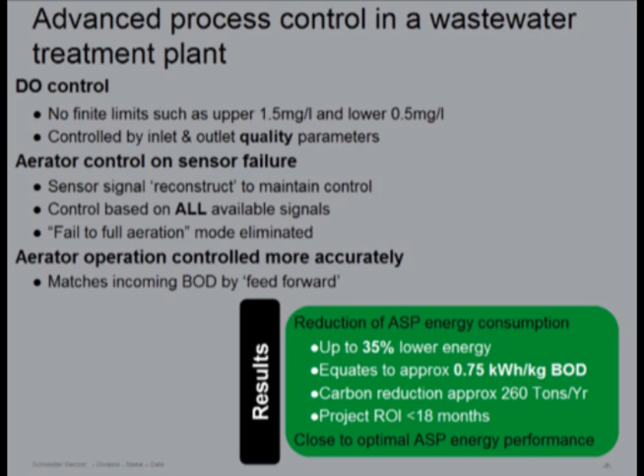I'm going to make these concluding remarks pretty short and to the point. You can see the first one up on the slide: water and energy aren't cheap or plentiful. Clearly water's become more scarce as drought conditions have been experienced in the past 5 or 10 years. Grant mentioned climate impacts, and clearly areas of drought are becoming even more impacted, and drought is more severe. Weather conditions are more severe. Energy costs, likewise, in the last 5 or 10 years have continued to climb, and we don't anticipate that in the next few decades they're going to get any cheaper.

The second point is addressing water and energy efficiency yields multiple benefits. Water and energy efficiency improve the reliability of the grid and the water infrastructure, and it frees up funds for other municipal projects, as I mentioned before. That's a really critical item, because you've got municipalities, cities, counties that are spending too much on both water and energy, more than they should, because they aren't efficient, and that money could be used for other municipal benefits.

Finally, there are a lot of opportunities in the U.S. to really transform the water and energy market. The water-energy link is clearly critical to the bottom line of city, county, and private water utilities. Increasing the market penetration of energy-efficient technologies is really an area that has great opportunity in the U.S. For example, Grant mentioned variable frequency drives. In the U.S., we only have a market penetration of about 9% of VFDs in the industrial area. In Europe and Japan, they have 19% and 38% respectively, market penetration that's tremendously higher, much more efficient, and they save a lot of money.

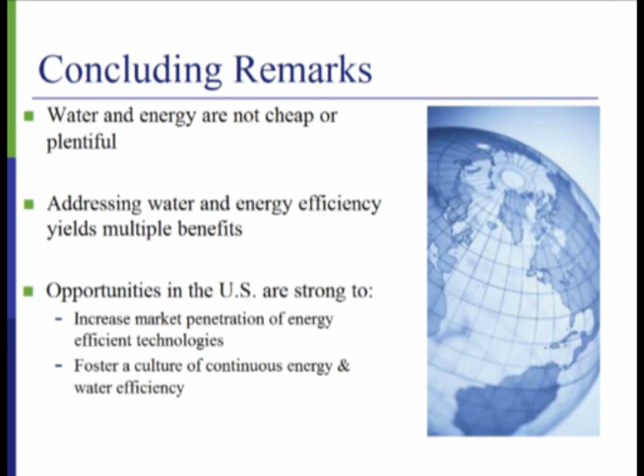So I think that we've heard a lot of good things today, and I'd like to open this up now to questions from everybody on the line.